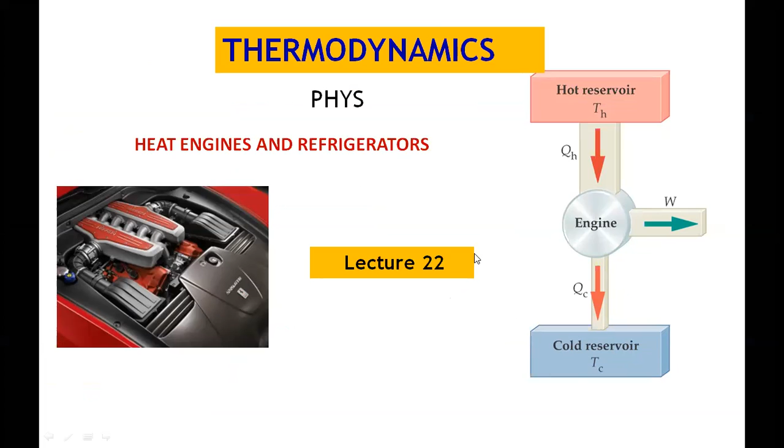In the last lecture we defined the heat engine, المحرك الحراري. The heat engine is a device that transforms heat partially into work. From its name, heat engine, محرك حراري, it converts heat into work, which is mechanical energy, because work can either be mechanical energy or potential energy. In this case it is mechanical energy done by a working substance undergoing a cyclic process, so it is a cycle. A cyclic process starts from a state and ends in the same state, or starts from an initial state and returns to the initial state again after passing through different processes.

This is the schematic drawing of the steam engine, المحرك البخاري. We have water; as a result of heat, the water converts into steam. This steam is at several hundred atmospheres, and water is vaporized at about 500 degrees Celsius. In this case we have the engine, so the heat converted into work, and this work moves the engine.

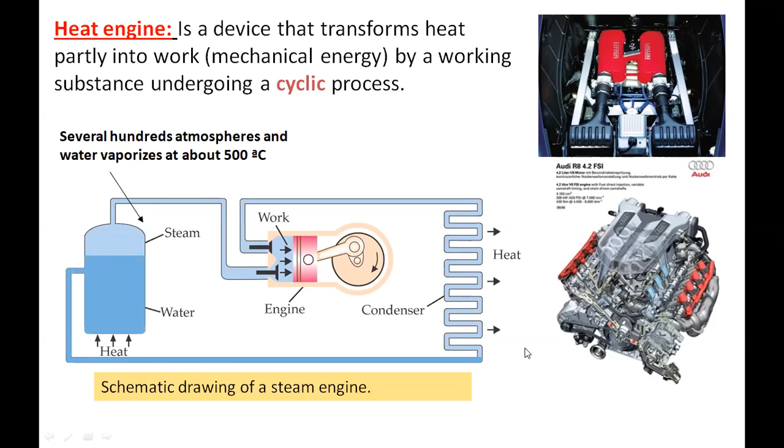Also in the previous lecture we discussed several statements for the second law, and these statements are very important in the second law of thermodynamics.

So we found that the entropy of the system never decreases. The entropy never decreases at all, so the change of entropy is always greater than or equal to zero.

Second, you cannot change heat energy into work with 100% efficiency. There is no efficiency of 100%, that is, there are no perfect engines. There is no perfect engine at all. This is the Kelvin version, Kelvin's statement about the efficiency and the perfect engine.

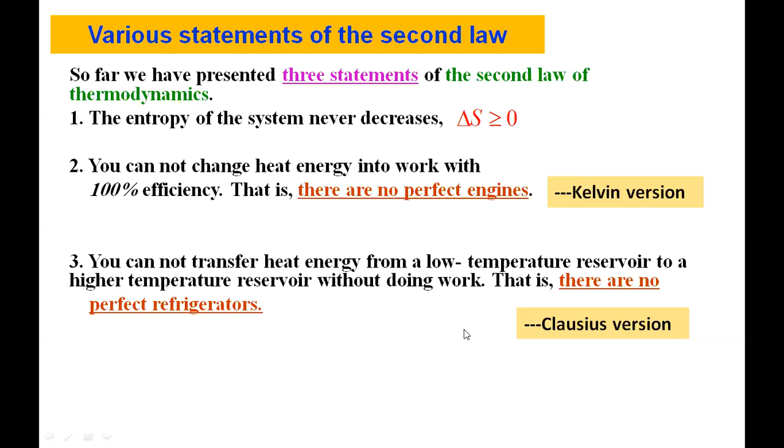Another important thing: you cannot transfer heat energy from a low temperature reservoir to a higher temperature reservoir without doing work. So we need work to transfer heat from low temperature to higher temperature. That is, there are no perfect refrigerators, so again the same idea, there are no perfect refrigerators. This is the Clausius version or Clausius statement.

One of the important things for the cycle process is the Carnot engine. Carnot cycle, or Sadi Carnot, a Frenchman, in the year 1824. What did Carnot say about the Carnot cycle? He said the heat engine with the maximum possible efficiency consistent with the second law.

Also, all thermal processes in the cycle must be reversible. All heat transfer must occur isothermally, because the conversion of work into heat is irreversible. The process of converting work into heat is an irreversible process. Also, when the temperature of the working substance changes, there must be zero heat exchange, and this is an adiabatic process. So the Carnot cycle consists of two reversible isotherms and two reversible adiabatic processes.

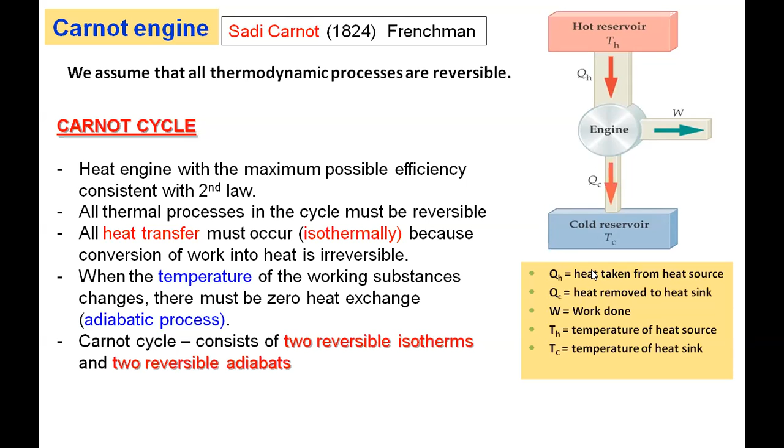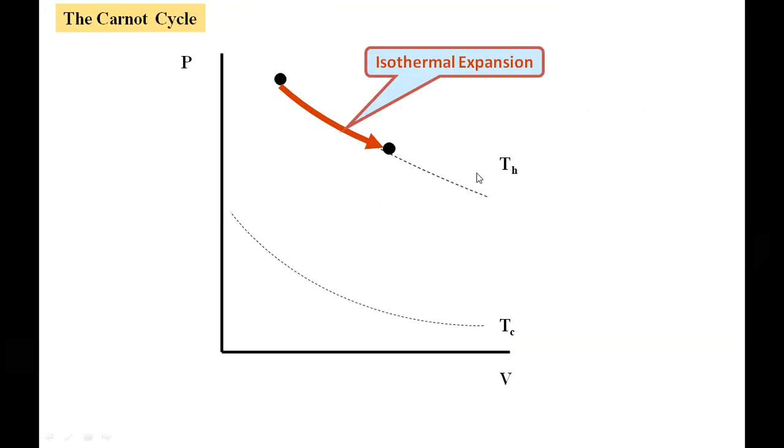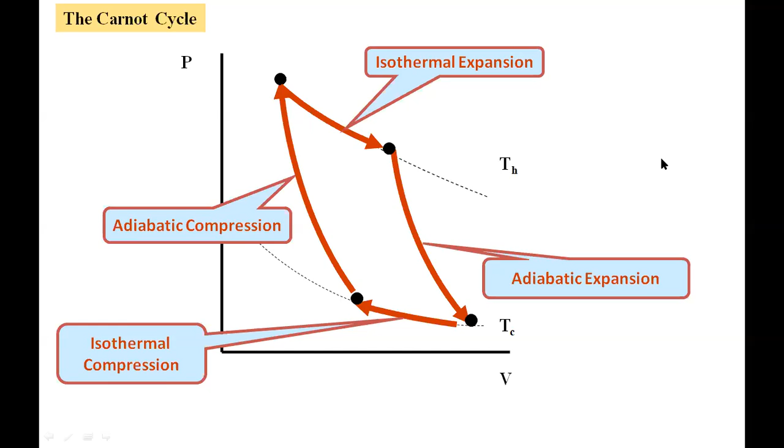In the Carnot cycle we have four processes: two adiabatic and two isothermal. First is isothermal expansion, then adiabatic expansion, and isothermal compression, also adiabatic compression. So we have two isothermal processes, one expansion and one compression, and also two adiabatic processes, one adiabatic expansion and the other adiabatic compression. These four processes occur in the engine. So, the efficiency of the Carnot engine...

In practice, the Carnot cycle cannot be used as a heat engine because the slopes of the adiabatic and isothermal lines are very similar, and the net work output, or area enclosed by the PV diagram, is too small to overcome the friction and other losses in a real engine.

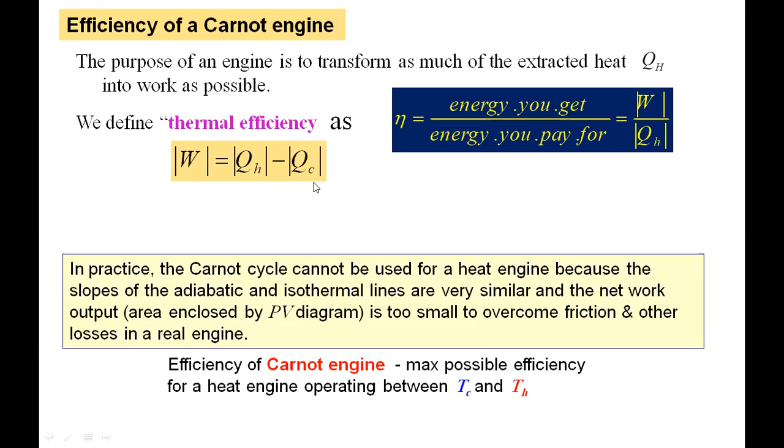So the efficiency of the Carnot engine is the maximum possible efficiency for a heat engine operating between TC and TH. The purpose of the engine is to transform as much of the extracted heat QH into work as possible. We define thermal efficiency as the energy you get over the energy you pay for. So the efficiency is the work divided by QH. We know the work equals QH minus QC, and if you substitute this, the efficiency equals work over QH, equals 1 minus QC over QH, and also equals 1 minus TC over TH.

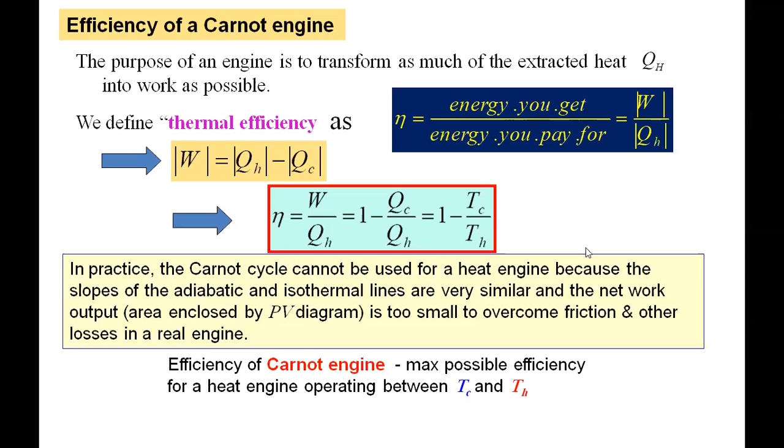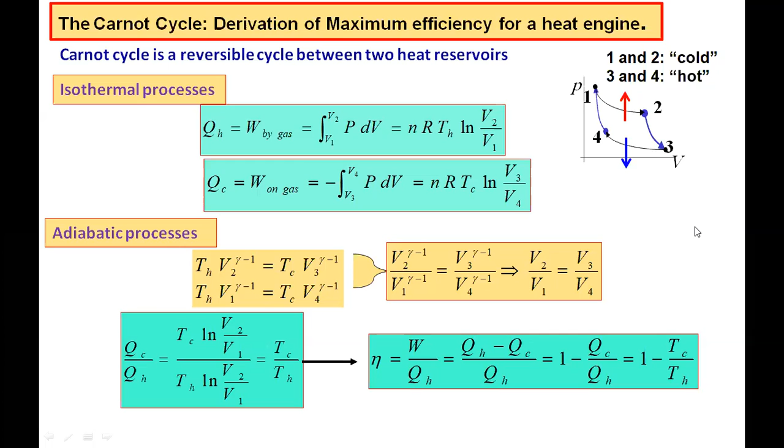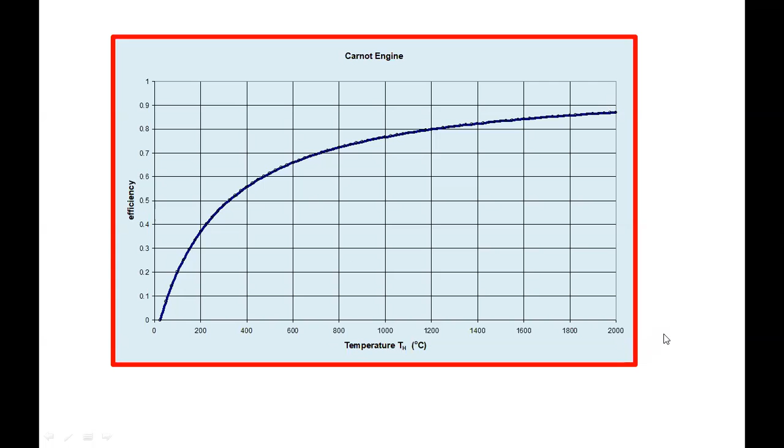Then heat goes out as work, done by the engine. So the work generated during one cycle of a reversible process equals QH minus QC, and if you substitute QC, it equals TH minus TC over TH multiplied by QH.